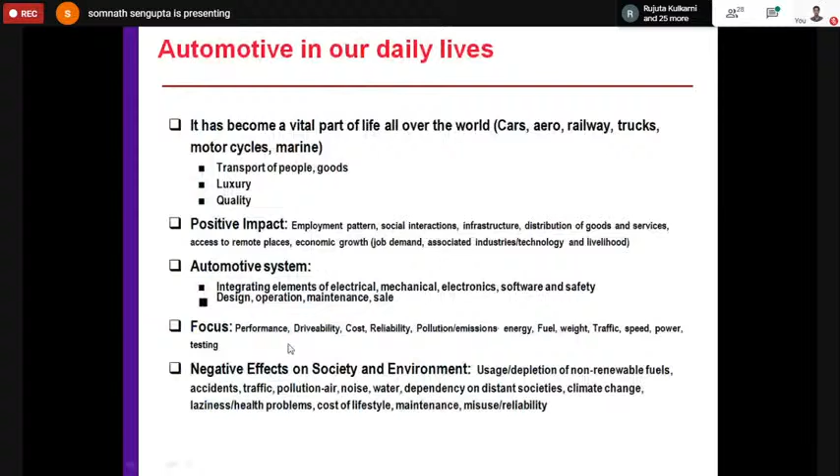So why am I talking about these simulation software? Because they help us make a foundation for developing control strategies, for modeling, and for analyzing the performance, so that we can proceed towards more advanced things: improvement of performance, drivability, cost reductions. We can do all kinds of things, because directly we cannot just go to the vehicle and start tweaking the parameters—that's a very costly affair, and sometimes it's dangerous for testing. But in simulation, before going to the actual hardware, the field, we can always go back to the simulation part.

And then we have DSpace also, which has models for testing, and they also have hardware for hardware-in-loop or simulation testing. Then obviously there's the very friendly MathWorks, which is friendly not just to academics but to industry. They give us a simulation platform, and we can also develop control code, and this supports deployment of code into microcontrollers and microprocessors, so that we can quickly test our control strategies.

Then obviously Bosch gives a lot of electronic control units. We have fuel injectors, actuators, brakes, spark plugs, batteries, etc. So plenty of these companies don't directly manufacture vehicles, but they indirectly support the automotive industries.

Then you have Cummins, which is quite specialized for engines and generators. And Eaton is also there—they're mostly into heavy engineering, so mostly power design, manufacturing, sale of powertrain for heavy vehicles. They mostly deal with controls and transmission.

So these were again the associated industries. It's not just, as I said, the jobs that they generate—it's also about the technologies. Since these industries may not be always expert in all of them, many times they provide subcomponents or subsystems. Using this, you can analyze the overall performance of the system, towards betterment or something.

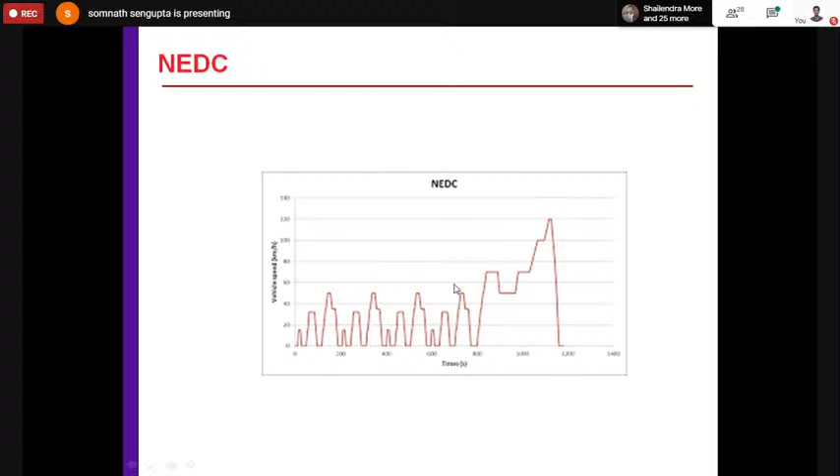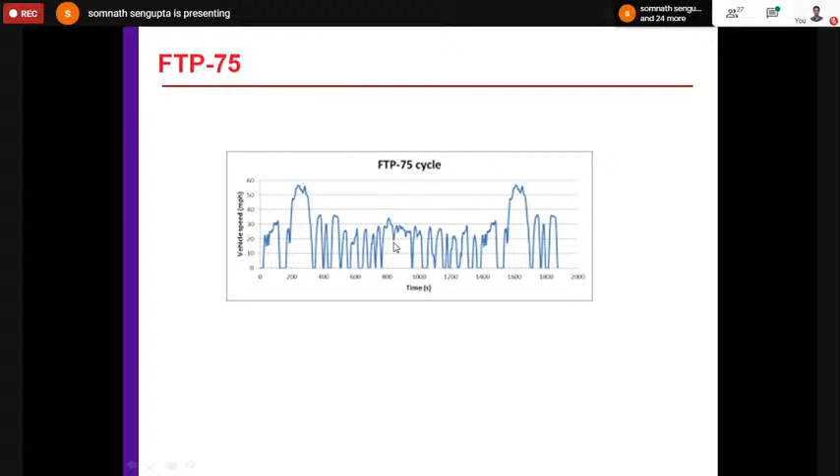As compared to this, then you have the HWFET. Here you have a lot of transients, but here you don't—the speed never goes to zero. That's one key difference. It continuously runs at a higher speed, and the tractive demands are always on the higher side.

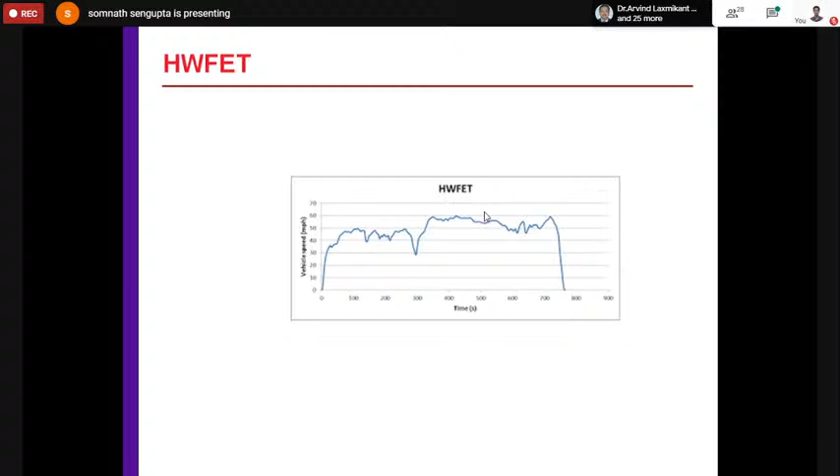Then this is our modified Indian drive cycle. It is developed by ARAI, and mostly they use this for characterizing vehicle performance and for doing all kinds of performance analysis.

So here is the cold start cycle, this is the urban driving cycle, and this is the extra urban driving cycle. This is kind of a modified or mixed Indian drive cycle, capturing the typical behavior in a somewhat simplistic way. You can see the top speed is around 90 kilometers per hour or so, but not for a large portion of the time.

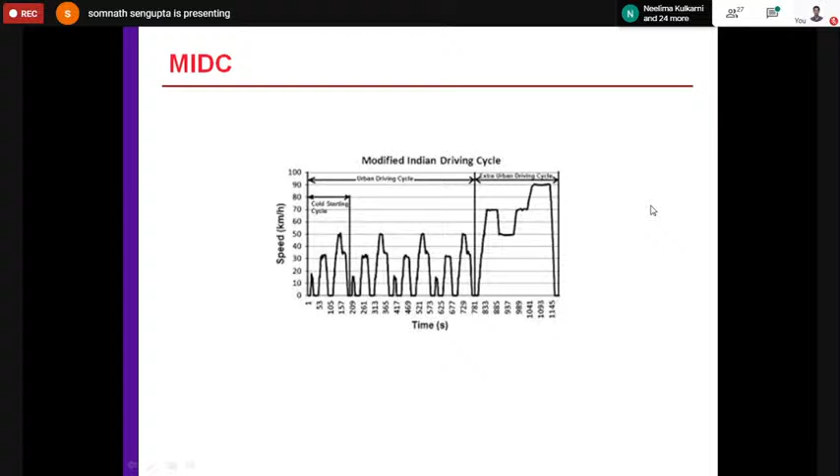Now let us go from the external environment to the internal environment. That's why I'm talking about the powertrain here. So what is this powertrain? It is responsible for transformation of power from the place of propulsion all the way to the wheels.

So then you have this engine, then you have the clutch—this is for a conventional vehicle. Then you have the transmission, then you have the propeller shaft, which moves at a lower speed compared to that, and then you have the differential.

This differential is used not only because it has a single gear, but also for negotiating curves. If the car is taking a left turn, the inner wheel will rotate at a lower speed and the outer wheel will rotate at a higher speed, and the differential allows for that. Typically it's a mechanical arrangement, but nowadays we are also having electronic differentials. I won't explain that in detail here, but it has multiple internal gears.

So ultimately it's always a single fixed gear ratio, but inside there will be some rotational toothed wheels, in which there's something called the spider gears and ring gear, and all these things, and using that they'll be able to negotiate the turn. Then you have the axles, and then it goes to the wheel. The wheel meets the road, where it has to overcome the inertia and the resistive forces. So this is the journey of the power that gets transmitted, and it also experiences the loading effect because of the wheels.

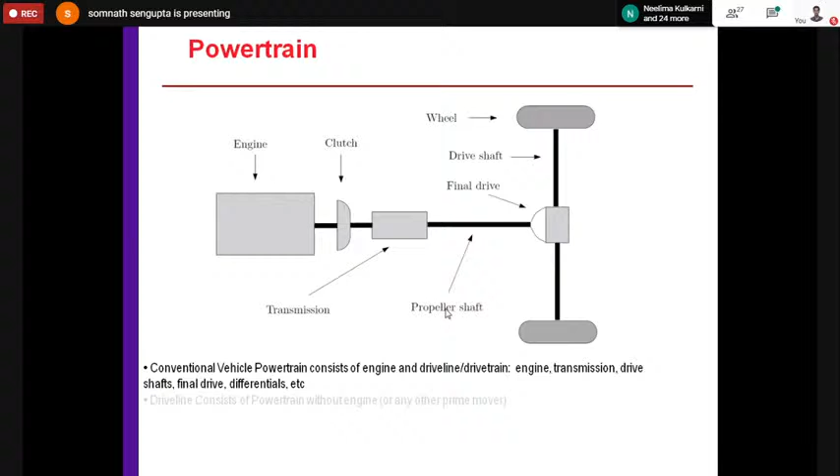I just mentioned that consider powertrain without engine and all. So driveline is all these things without the engine part. Typically it's a mechanical system. For electric vehicles, this clutch may not be there, and then we have the motor there.

Typically we can analyze the second law of motion used to derive the models. The lower gear will result in higher torque transfer and higher torsion. So lower gear, typically in a vehicle, has a higher gear ratio, and that multiplied with the torque generated will be higher. The speed will be lower.

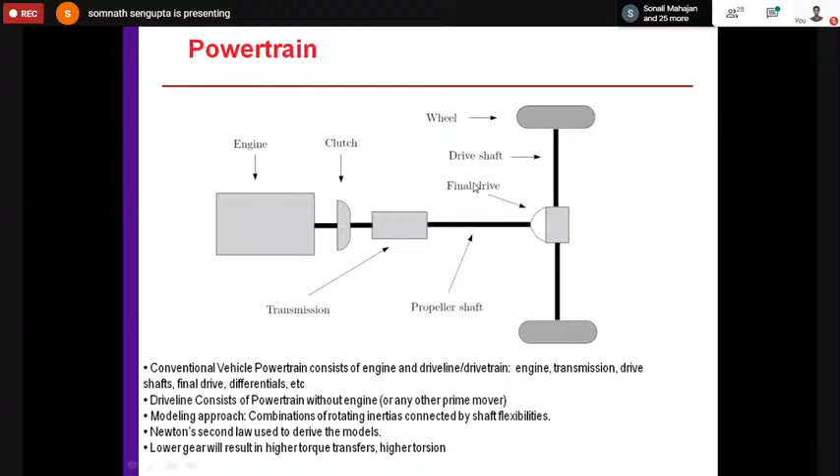Now having this powertrain in mind, HEV is all about changes in the powertrain structure. Nothing external typically changes, apart from maybe the charging thing, but typically an HEV, in very layman language, has a motor and an engine, and then there are different configurations.

One is the series HEV, in which the entire propulsion, the mechanical power, is through the motor. The engine behaves as a generator working on its optimal operating point, and then it charges the battery. From the battery, the motor is always mechanically powering the output, which will power the wheels.

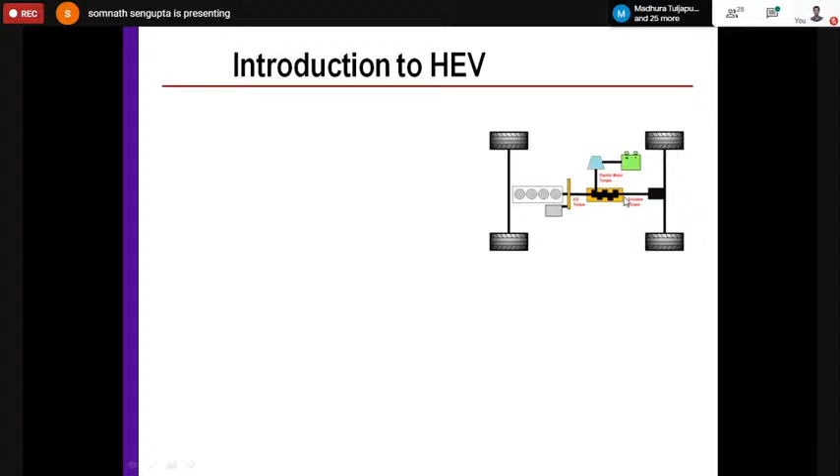But in case of parallel HEV, which is more complex control-wise, both the power produced by the engine and the motor are mechanically coupled. That's why the control strategies are much more complicated as compared to a series HEV.

So this is the need for HEV. One is fuel consumption - why do you have HEV? Because the engine consumes a lot of fuel, so it's good to have a motor which will assist in such a way that some part of it would be taken care of by the electrical energy. Second is the emission legislation.

There's a huge pressure, right - Bharat 4, Bharat 5, Bharat 6. I think we are quickly shifting to Bharat 6 emission norms, in line with the Euro 6 norms as well, but I think there's still some going on. I mean, we have not yet implemented those emissions fully, we don't follow those things strictly. I've seen some very old vehicles with Bharat 2 norms as well.

But we should go there because it affects the emission. They are not so stringent, and because of that there are too much emissions, and because of which you can see bad air quality all around, at least around India. So this is where the electrical source of power helps - you'll be using less of the engine, and then you can emit less emissions because of that.

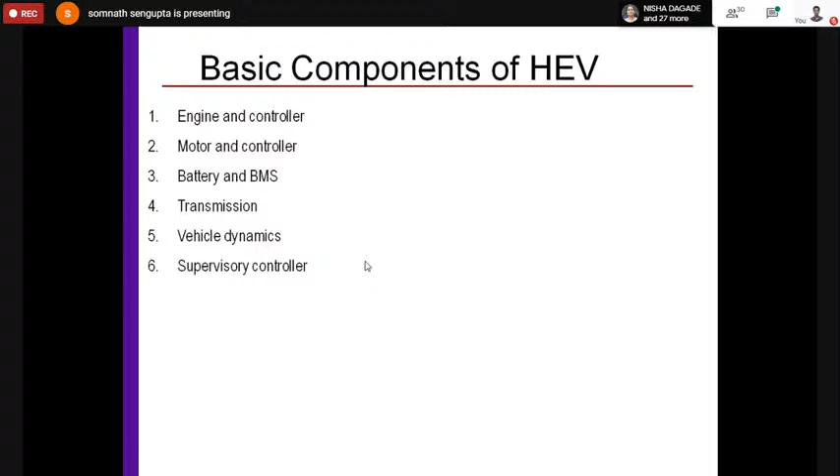So vehicle dynamics per se is not a component, it's a formulation kind of thing, it characterizes the vehicle systems, and it talks about what is the longitudinal motion, what is the lateral motion, how the vehicle behaves. This is very important for analyzing the safety of it, to see whether the vehicle is propelling to the required speed or not. And of course, the supervisory controller, which I've just talked about, it's a hardware board, and it can be mostly separate.

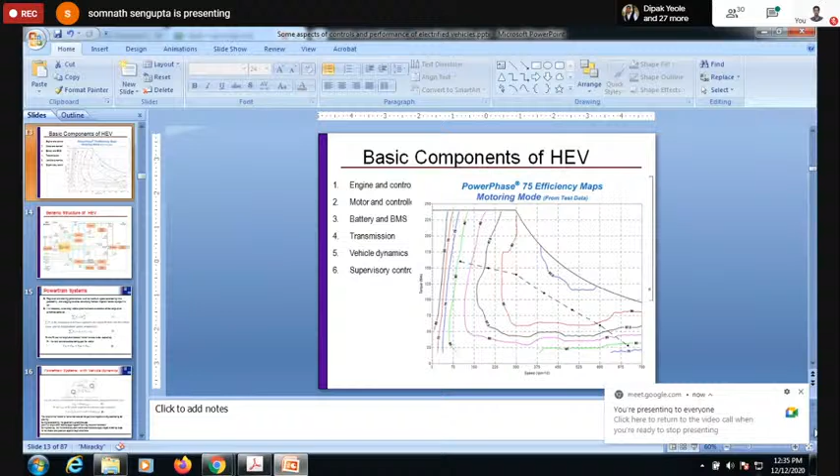Hello. Yeah. Sorry about that again.

So this is the torque speed efficiency curve. These are again important for designing controllers, so that the torque speed of the motor will be at least close to these curves or contours, so that the efficiencies are the highest possible.

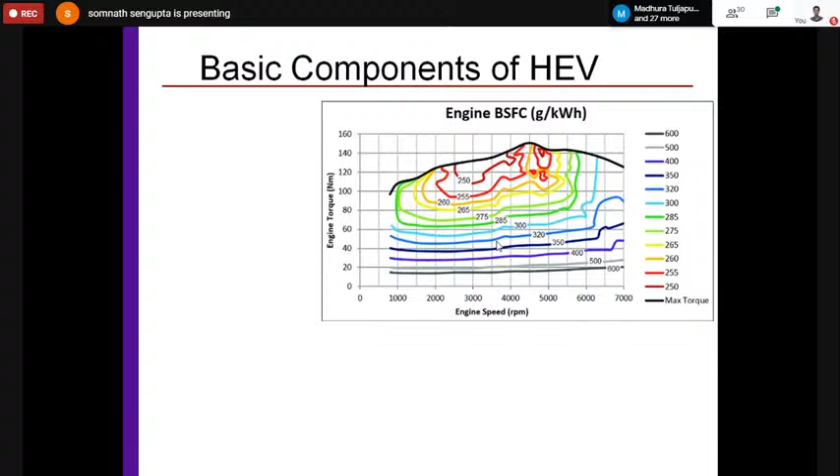Of course it's not always possible, but these are again important for the supervisory controller. It will try to take into consideration these curves, and based on these curves, it will try to do the torque split between them, at what point whether the engine is more efficient or the motor is more efficient, so it will consider all these aspects. It will also consider the fact that the total torque demanded...

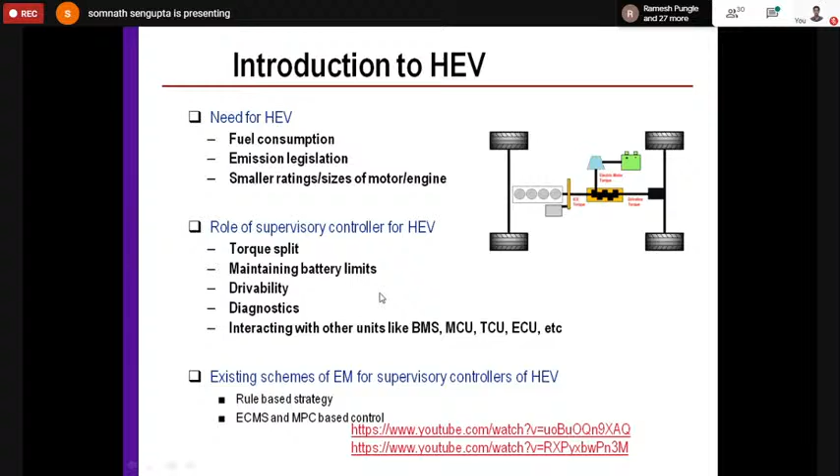Let's say the motor is small, the engine is also small, so it will try to give the right amount of torque command so that the demanded torque is satisfied. It will take care of all these things, but it needs knowledge of these things. That's why it is very important to know these torque speed characteristics, both for the engine as well as the motor. So these curves will act as references so that you will be able to design the proper control strategies.

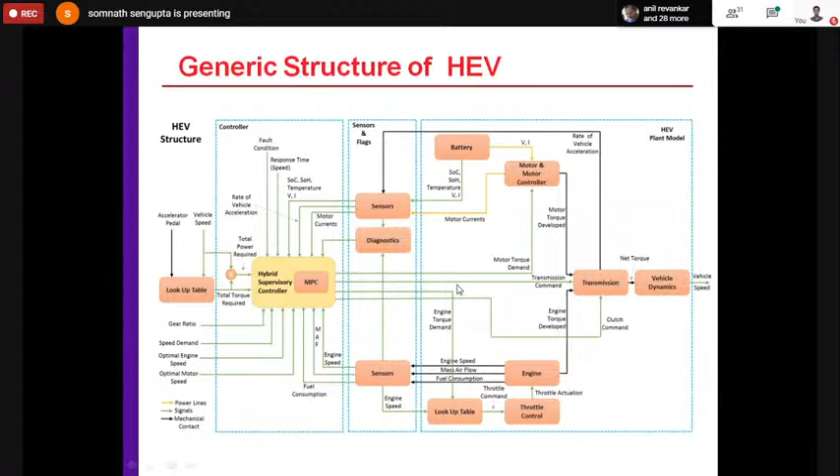So that's why it's very important to understand the forces. As I said, it's not just electrical or mechanical, it's actually both, or rather it's all electronics, electrical, software, everything. We need to understand this so that we'll be able to design electric vehicles, not just the architecture, but also the control strategies.

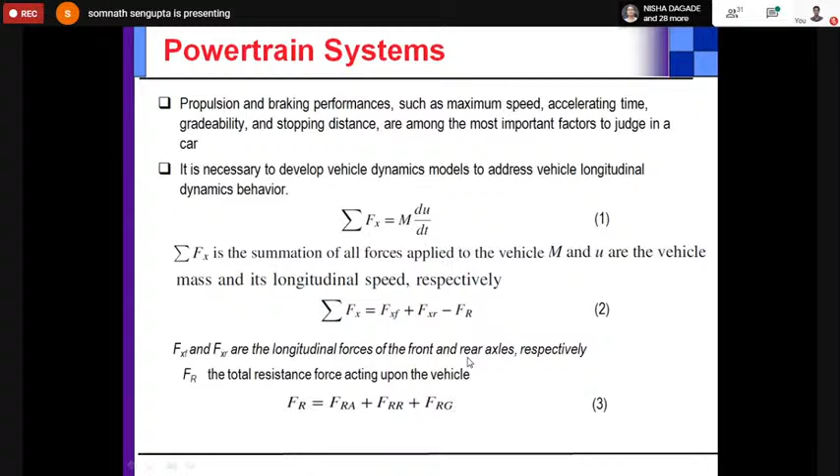This net force is the tractive forces at the wheels, the front and rear wheels, minus the resistive forces. The resistive forces can be due to aero drag, rolling resistance, and the gradient. So it's like a free body diagram of the car, and you can see there are different forces acting on it.

The aero drag is half rho Af CD u squared. Rho is the air density, CD is the coefficient of drag, Af is the frontal area of the vehicle, u is the speed. Then you have mu, the coefficient, and mg is the weight of the vehicle, then mg sine theta. These together form the total resistive force.

During acceleration, the powertrain produces positive longitudinal force by applying positive driving torque to the wheels. During braking, the friction braking system adds another negative braking torque to the wheels, or sometimes if it is regenerative braking, the braking torque comes from the motor to the axles, and then it behaves as a load for the axle. So two directions of braking torque come: one is the mechanical friction braking torque, the other is the regenerative braking torque, both applied to the wheels and producing negative longitudinal force.

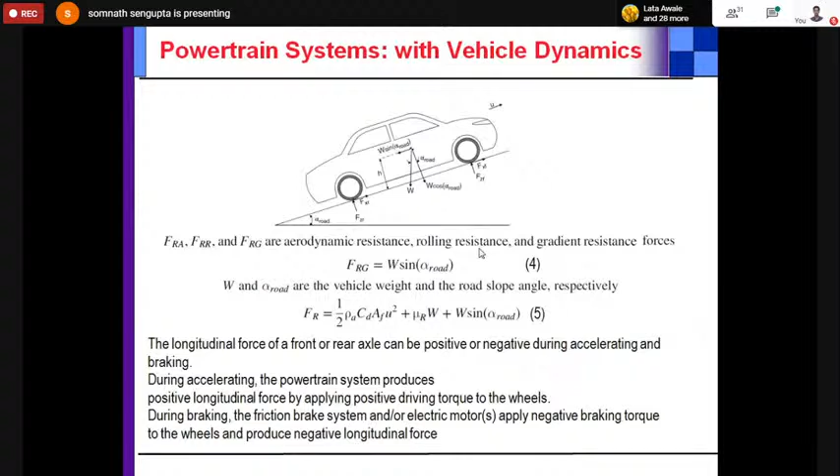Now based on the torque, we have to talk about the torque split. Let's say I told you that 100 Newton meter of torque is required. Now how to decide, whether to use 50-50, 40-60, 60-40, or 30-70 split? For that we need to analyze each of the curves.

So let's say for the engine curve, we'll typically be using the motor at lower torques, and from lower speed to higher speeds, but then you can also have a power assist on very high torque and high speed parts. So you can have both engine and motor for that, and typically in this region you can have engines also.

So these are again like an if-then-else situation, which can be easily captured in flow charts. Using flow charts you can implement this if-then-else logic.

If there is sufficient charge, and the torque that the motor can deliver is... by the way, I think I forgot to tell you that just like engine maximum torque, we have the maximum torque envelope of the motor also. At different speeds this is the maximum torque, and this is the base speed after which it goes into constant power mode, meaning with increasing speed the torque reduces.

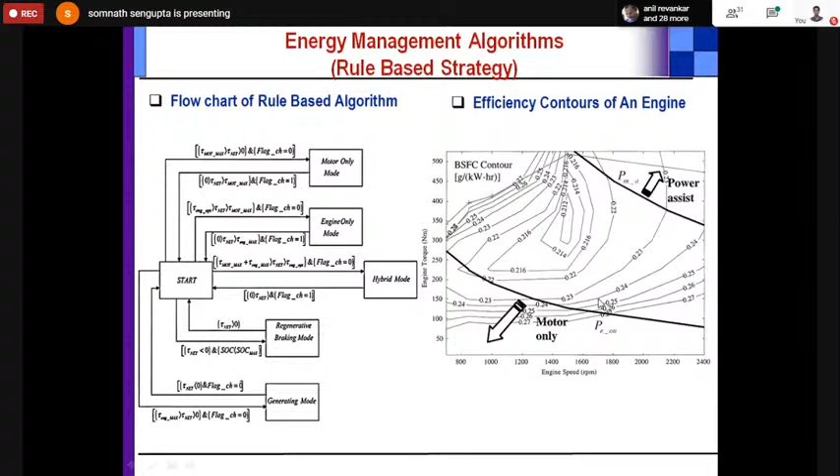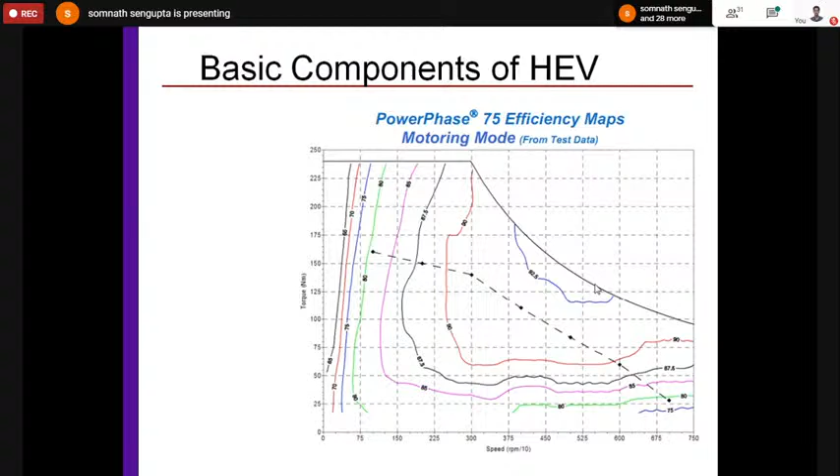What am I trying to say here? These drive cycles, which I've talked about, actually correspond to different torque speed points. So if we try to generate drive cycles which correspond to better torque speed points, we can have better efficiencies. If the torque speed points adhere to curves having higher efficiency, then overall efficiency will increase. That is what the paper was all about. It's not a very complicated paper, but we got some good results, so I wanted to share this.

So I'll be just talking about these things. Now I'll be shifting gears, because I will now only be talking about electric vehicles.

KPIT has a bus called Revolo, and they had given that bus for testing. We verified our simulation results with the practical results.

So electric vehicles are first of all criticized for their limited range compared to conventional fuel-driven vehicles, because there is always range anxiety. The problem here is that research work is always about solving some problem, and the problem we're trying to solve is how to improve the range. By improving the efficiency, so that we can save more energy and go further for the same charging.

But the driving pattern also influences the energy consumed in electric vehicles over a path. That's because if I do a lot of acceleration, the torque-speed points will be different; if I do less acceleration, again less torque. All different situations come into picture. So the way I am driving has a huge impact.

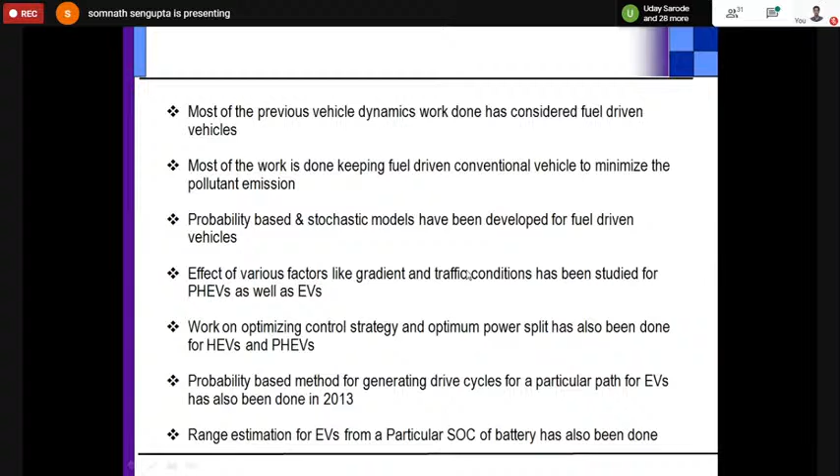Now let us look at it closely. Let's go back to the beginning. Ah, sorry, somebody is calling me.

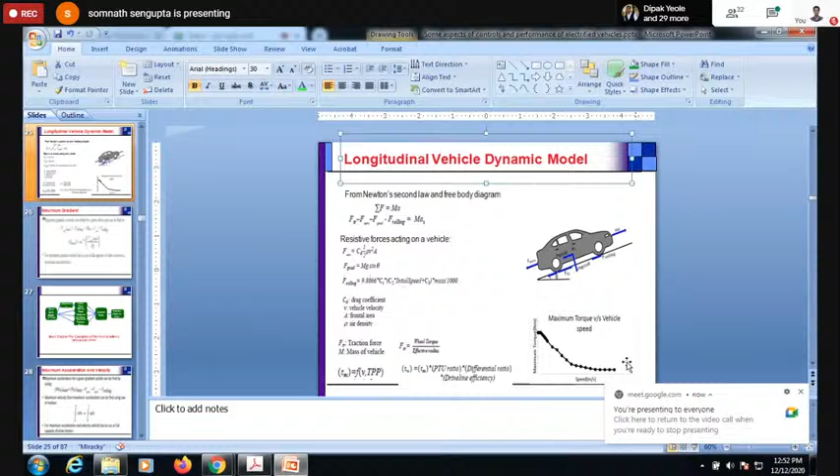Yeah, sorry about that. Am I audible? Yeah. Let us look at it.

We did this for an electric bus, and tried to analyze the different forces acting on it - the rolling resistance force, the gradient force, the aero drag, and the net force, which is mass into acceleration. These are the expressions for the rolling resistance force, the gradient force, and the aero drag force.

These drag coefficients were given to us by the company's R&D people, and we used these coefficients along with the characteristics of the motor.

If you see, the motor had a speed-torque characteristic and a maximum torque envelope. We cannot exactly give the motor's characteristics, so this is just a representation of the torque-speed character, showing the maximum torque available at different speeds. You can see that at higher speed we cannot deliver more torque. We have to consider this before talking about drive cycles. This is not about efficiency, it's about the maximum torque the motor can deliver at different speeds.

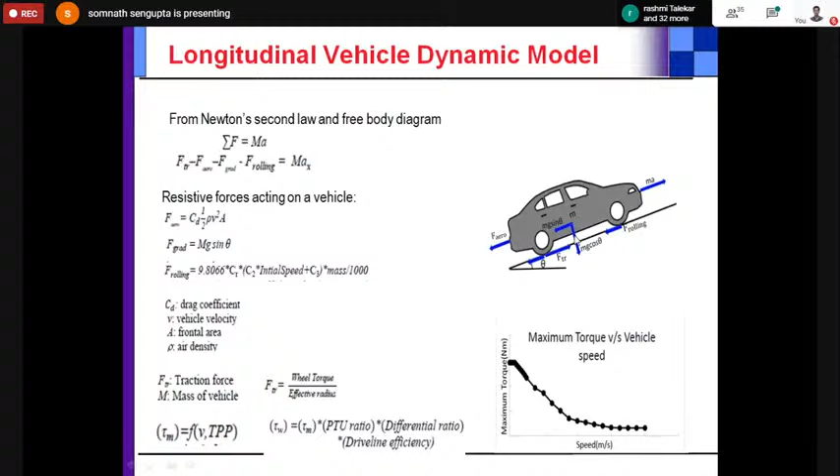This is again for a given drive cycle, given speed, so we can get that result, with the vehicle running at full capacity. For maximum gradient, this is for TR max—considering the motor is giving maximum torque, which results in maximum tractive force, and based on that, we find the maximum gradient we can get.

So how can we get it? Through these drive cycles, we can characterize the drive cycle—what acceleration we can have. We can see the speed at each point in time, T1, T2, T3, and from that find the acceleration rate, which is the rate of change of speed. Using this acceleration, I-alpha, rolling force, aero drag, and other factors, we can calculate things. I-alpha is roughly proportional to the mass of the vehicle, but it's a bit more complex than that.

I think somebody is sending something. Is there any? Okay, fine.

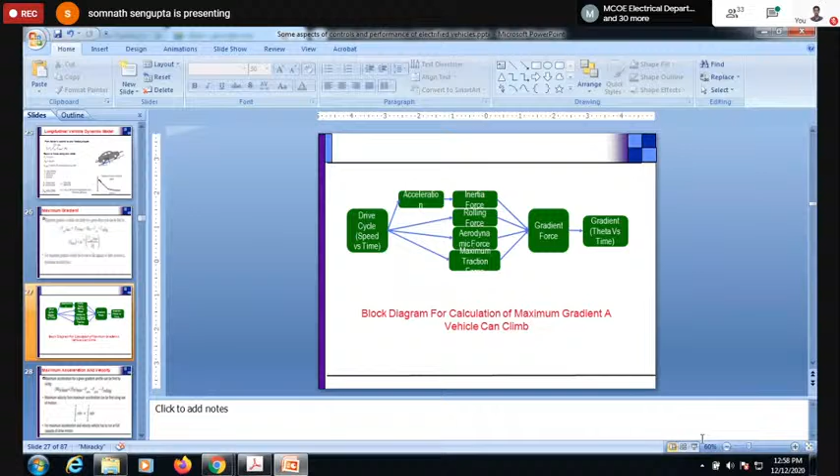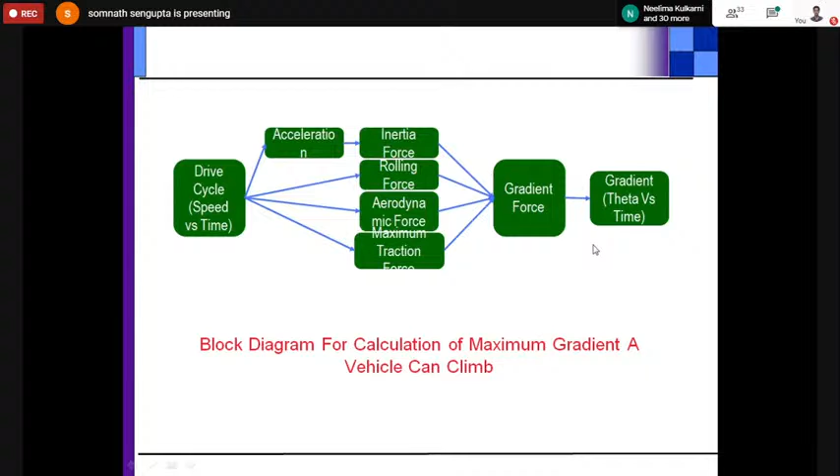Okay, so based on all these considerations, we can also talk about the gradient force. Using that, this is the representation, and we can find out the gradient theta versus time. At each point, given the speed, this is the instantaneous speed we are extracting from the drive cycle, and corresponding to each of the speeds, what is the maximum gradient that the vehicle can negotiate? We can do these things thanks to the expressions.

This is coming to the maximum acceleration that it can have for a given gradient profile. We cannot have two variables for a single equation, so we're keeping one, assuming that something is known. So what should be the other value? For a given gradient profile, let's say we know that the vehicle is moving up a gradient, and we know what the gradient is. Then, for a given maximum possible tractive force, because of the maximum torque that can be delivered by the motor, what is the maximum acceleration we can achieve?

Why are we doing this? Again, we try to find out the maximum acceleration so that we don't exceed the given acceleration. Using this very simple relation: v dv by dt and ds by dt. It's simple mathematical jugglery. Speed is equal to ds by dt, where s is the distance, and acceleration is equal to dv by dt.

So that means from 0 to this speed, and from 0 to s, this is the distance. So when it is going from 0 to v speed, the distance traversed is from 0 to s distance. What is that? What is the maximum velocity from maximum acceleration? Using the maximum acceleration, we can apply the law of motion. So how can we do this actually?

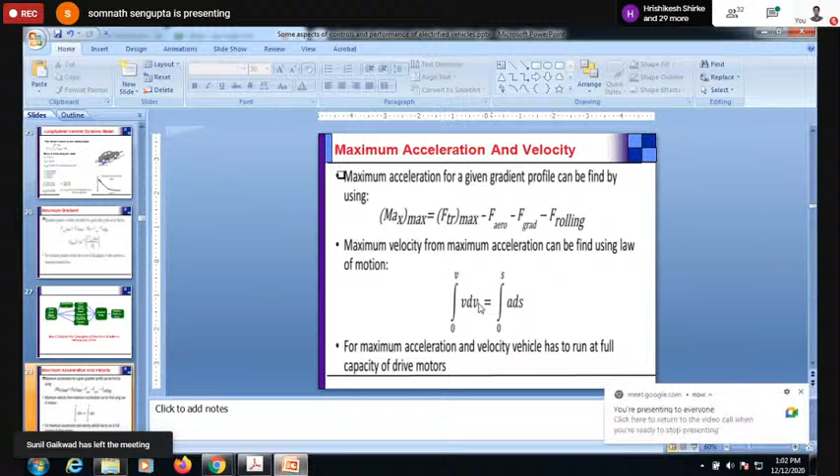Yeah, sorry, once again. Yeah.

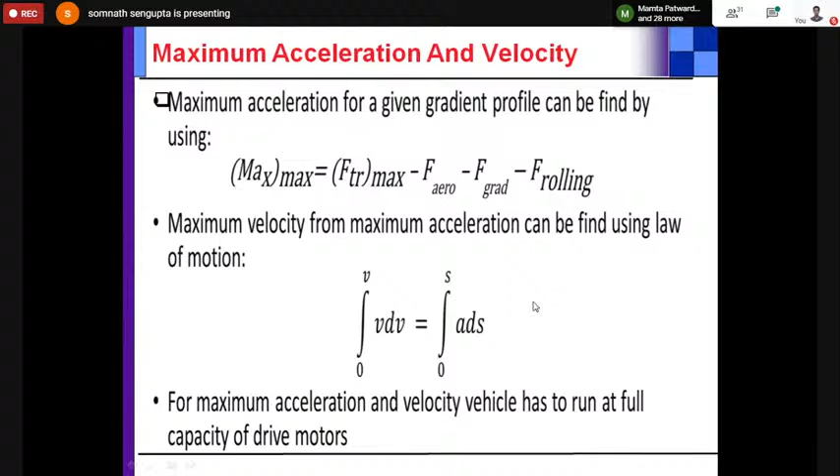This will actually help us in shaping the profile, which is not directly mentioned, but there is an algorithm we have developed. Using this concept, we generated the driving cycles that are best possible, which will go through the best optimal efficiency points for that.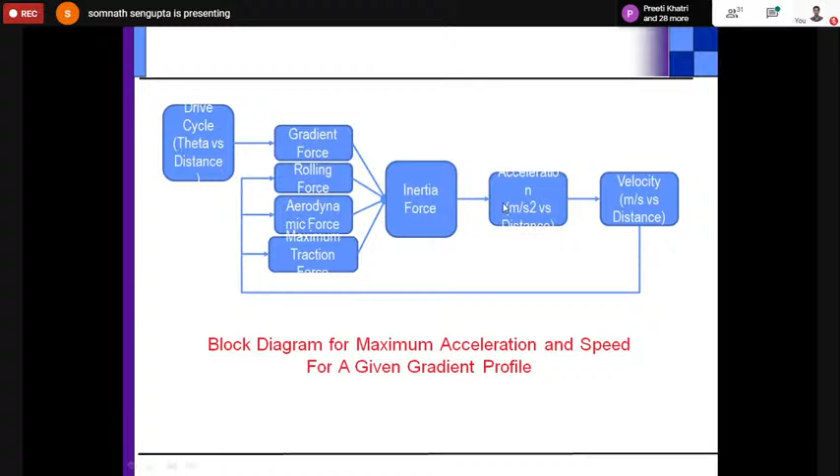Now, similar to the gradient part, we could find out the acceleration part also -- what is the maximum acceleration given a gradient force. Once we know the gradient, we can find out the maximum acceleration that is possible. This will govern each point since we will be generating these drive cycles. I'll just do some forward referencing here.

We'll be generating these drive cycles here -- this kind of drive cycles. These drive cycles will be generated, but we know the maximum acceleration we can have, so this governs the maximum limit on the acceleration. This tells us that at this gradient, what is the acceleration, and similarly, what is the maximum gradient we can have. So all these situations will be helpful in that, and we develop these algorithms.

I think in the interest of time, we have to just talk very briefly about this. Based on that, we keep on generating these torques, and we keep on generating these speed points.

How do we do it? We do back calculation from a given torque. So let's say that some torque is required - this is the T min, and there will be some ratio fraction of the maximum torque.

From there, we are trying to find out what is the acceleration needed to satisfy this torque. But in order to have that acceleration, is it exceeding the maximum acceleration we just computed? Then for that acceleration, we'll also talk about the jerk, because jerk is the rate of change of acceleration. From that, we'll find the speed.

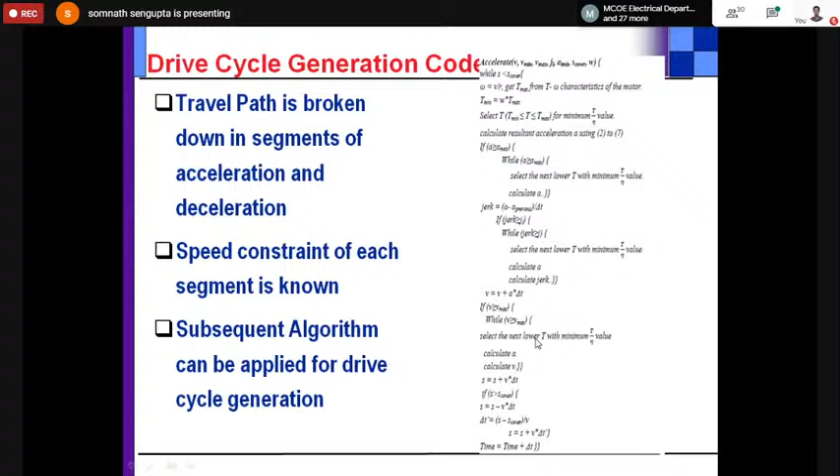Then from the speed, we'll find out the distance it will be traversing. So this is an algorithm which we developed, and from this we generated the drive cycle. This drive cycle automatically keeps on generating, and it will actually behave as a reference for a driver. I'll share the slides also - this is a set of points in which you can keep generating that.

And of course, we can always say things like torque divided by efficiency, because the torque gets affected as it traverses from the motor all the way to the wheels. Similarly for deceleration, but it happens in the opposite direction - just like torque divided by efficiency, here you have torque multiplied by efficiency.

So the torque traverses - this is the mechanical torque, and then it gets multiplied. The mechanical torque at the wheels gets converted from torque to speed, mechanical torque speed, then converted all the way to the battery. So the mechanical power, in case of regeneration, gets converted to electrical power.

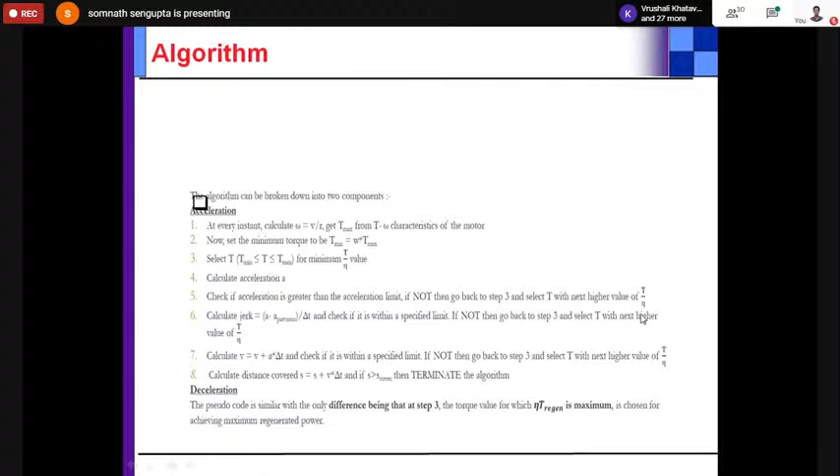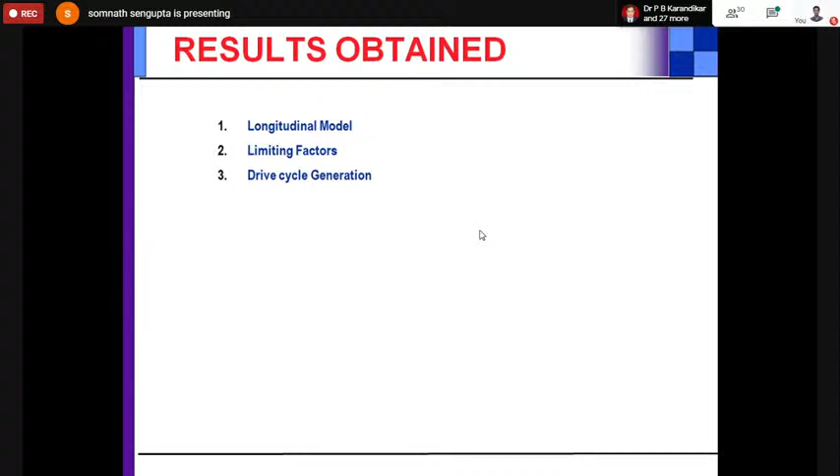Now, using these algorithms, we could generate plenty of results. But before that, we were actually using an actual electric bus, and because of that, we had to ensure that whatever model we're trying to build, which mimics the actual vehicle, matches as closely as possible. Then only we'll be confident in saying that whatever model we developed is mimicking the actual real system.

So that's why we use these parameters - these are real parameters from an actual vehicle: motors, frontal area, differential ratio, tire radius, drag coefficient. All these things were actually given to us by looking at the vehicle. And then we used the same motor - you can see the motor rating, everything. We used the same equations, and surprisingly, it matched very, very well.

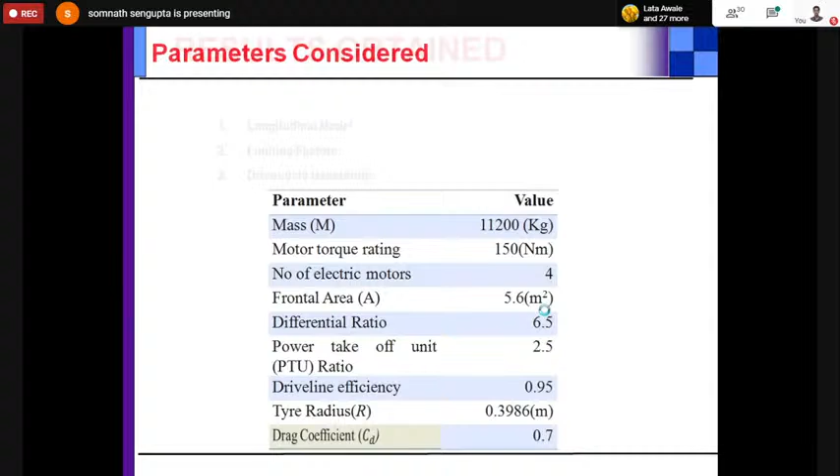So one is the real electric vehicle data which we gathered, and the other was the model data. You can see that both are matching - more than 95%. Because it is short, there are some discrepancies here, but the entire trend is matching. So what we did was use the same equations and same parameters, and using this model, we were able to match this.

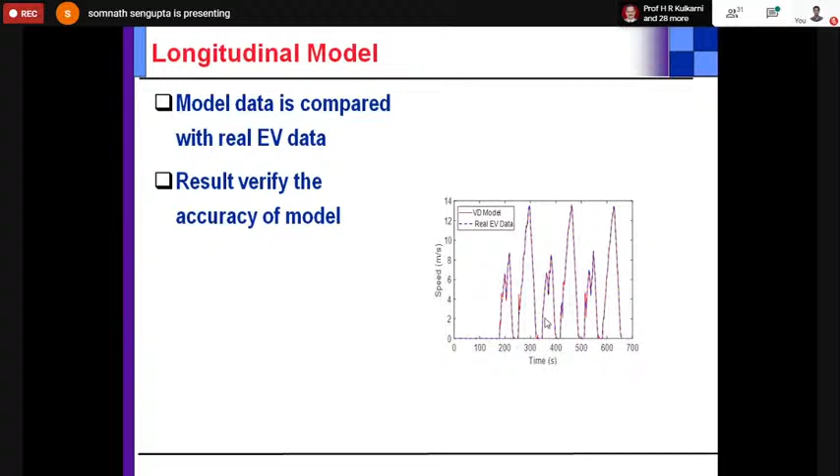So they verified the accuracy of the model. Once we verified the accuracy, we had the confidence that since it is behaving like the vehicle, we could do all kinds of operations on it - we used it just like the vehicle.

So we used it in different drive cycles - one was the Mumbai drive cycle, the other was the Delhi drive cycle. This was the velocity profile for the Mumbai and Delhi drive cycle respectively, and these were the different gradients - this is the gradient that can be possible, even this negative gradient.

In order to sustain this kind of motion, you can see that the gradient cannot possibly be positive - it has to be negative. Even zero is not sufficient.

That means at very high speeds, the tractive torque of the motor is not sufficient to sustain this speed. So what do we need to do? We need to have a negative gradient also in this space, so that the extra traction will be provided by the negative gradient force.

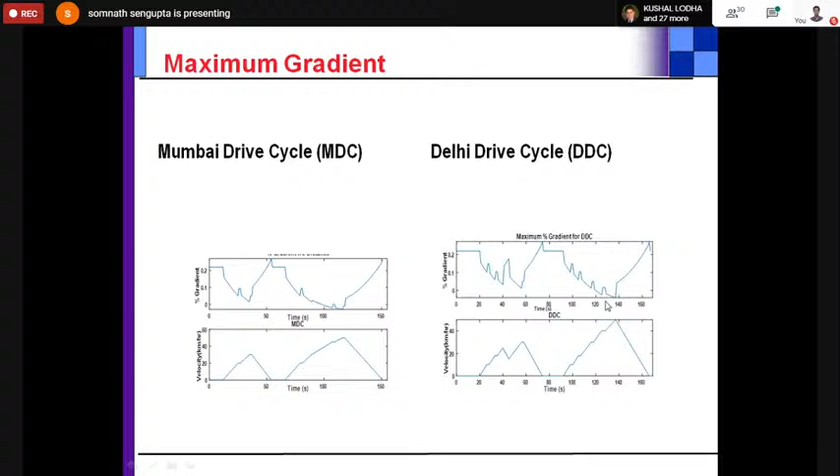Similar to the Delhi drive cycle also - you can see that the bus is not very sufficient for a Delhi drive cycle, even though this is quite high, but then we need some kind of negative slope so that it will give some extra traction force. This is what we analyzed.

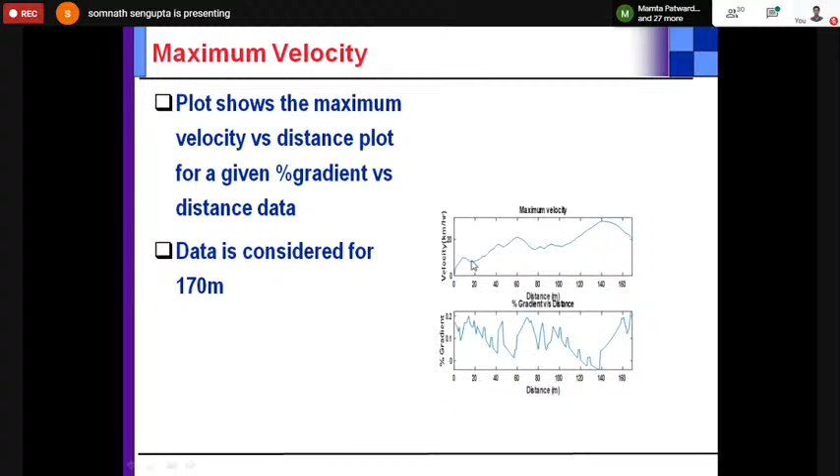So now this is the maximum velocity. Similarly, we could also get it at each of the points. So for a given gradient, what is the maximum gradient velocity that you can achieve? We could compute all these things.

Now, drive cycle generation data. Using all this analysis, we could generate the data. So what is the data we generated? We just generated the speed versus time profile, which was nothing but a set of accelerations and decelerations. We iteratively did that using these algorithms, considering the upper and lower speed limits, and generated these drive cycles. There are different types of drive cycles: smooth drive cycles and mini drive cycles, which are more efficient.

This was the weighting factor. We had used some weightage factors to talk about what is the ratio of maximum torque that we are using. So when it's one, we are using maximum torque. But with different weighting factors, with zero weighting factor, the time taken was quite large, with less torque, very less torque, but the net energy consumption was quite low. In the high torque case, when the weightage factor was high, the net energy consumed was quite high. So it's somewhat inversely proportional.

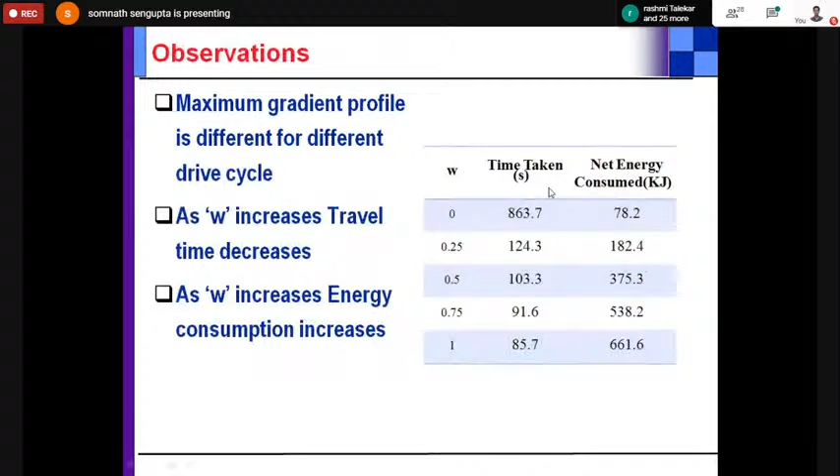It's not the same drive cycle, but it is the same distance. The distance is the same, but the integration of the area is nothing but the distance, and that is the same. The area under the curve, the integration of the speed profile, is the same. So we can choose all these things.

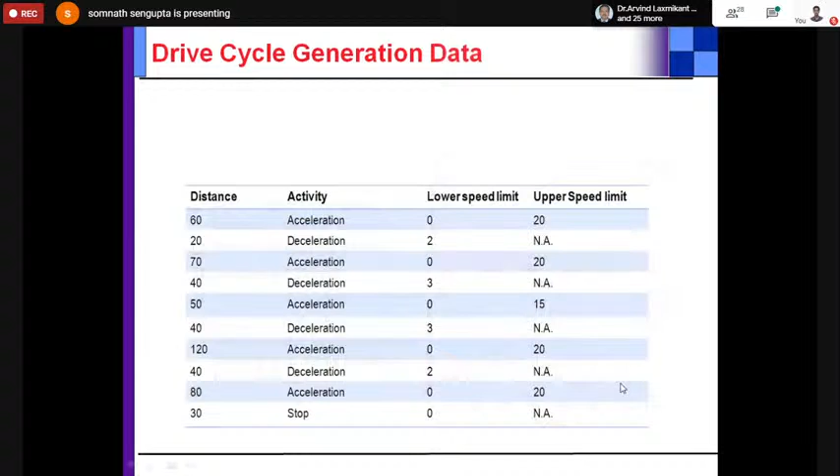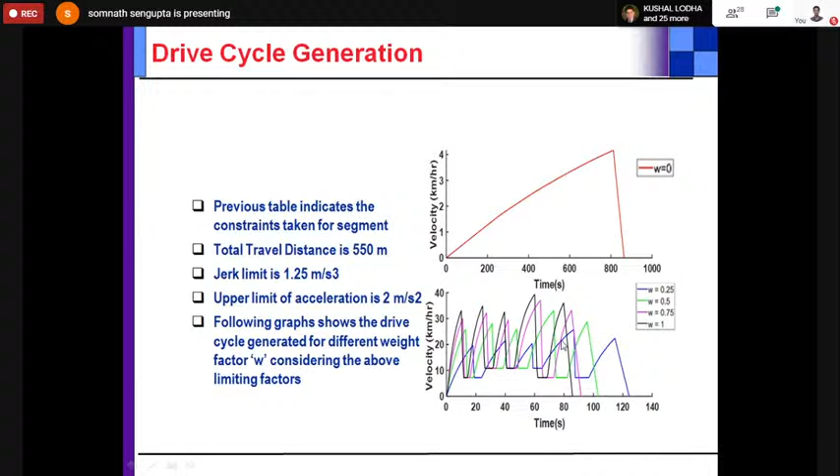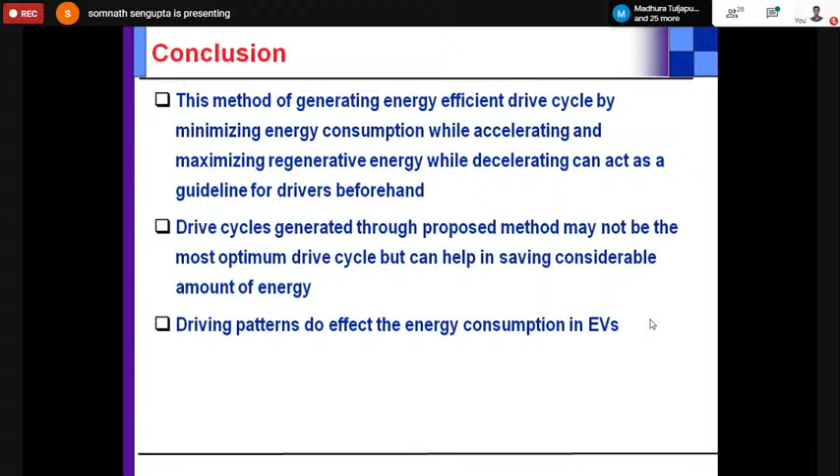So this option is given to the driver: if W is equal to 0, then you can have the best possible energy consumption. But if W is on the higher side, the energy consumption will be high, but the time taken will be quite low. So the final point is that driving patterns do affect energy consumption, which is a known fact, and we generated some drive cycles which will help us in doing this.

Now coming to the second case study, I think I'll be able to cover two case studies today. This is again related to electric vehicles, but it's a very interesting topic: the predictive supervisory controller for an HEV operating in a zero emission zone.

In different parts of Europe, like the UK, I saw there are places called low emission zones. This is coming up in India also, where certain places don't want emissions because of safety concerns, maybe hospitals or child care. So what do you do then? Suppose you have an HEV operating and it enters that physical zone. This was a conference paper we worked on with Tata Motors, and we developed the strategy and presented it at the ITEC conference in Detroit, Michigan. They found it quite interesting.

So what are we trying to solve? We're trying to make a strategy so that the HEV will save enough energy so that the moment it goes to the zero emission zone, it can afford to become an electric vehicle.

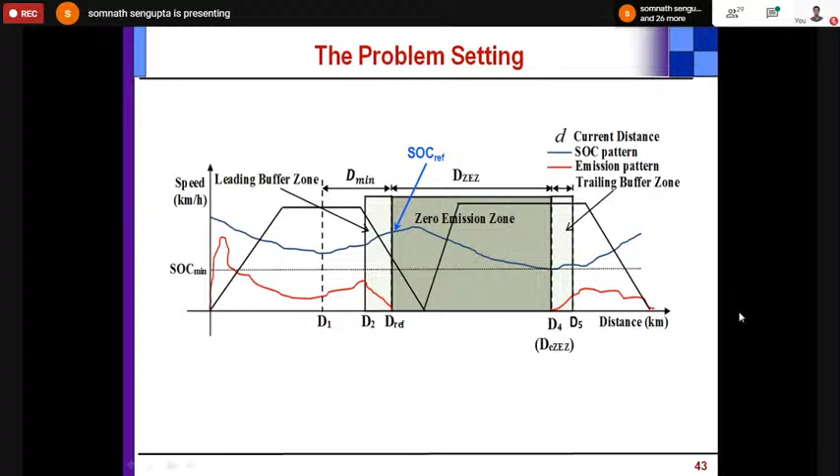The buffer region helped us to taper it off, and similarly taper it on, so that once the zero emission zone is going far and far, it can again go back to higher emissions and start polluting again, happily, without anybody disturbing. But this is what we designed.

So now let us talk about this P2 HEV architecture that we considered. As I told you, HEVs have different architectures—series, parallel, and I think I forgot to mention combined series-parallel architecture is also there. But here we are considering only the parallel architecture, and in parallel there are different configurations. So we use the P2 HEV architecture.

So this is the P2 HEV architecture, and here there is an axle. The engine torque and motor torque are coaxial, delivering torque in a coaxial manner. This is the clutch, this is the gearbox, this is the differential, and this is the axle.

These are the parameters that we used. Each cell voltage is 1.2, vehicle mass is 1000 kilograms, and so on.

So basically what is happening is the motor and engine torque both contribute to the demanded torque at the wheels. There is another clutch here that hasn't been mentioned yet, so we can have different kinds of configurations.

We can have the motor turned off and only the engine running, or the engine turned off and then the motor. So there is a clutch there because we cannot suddenly turn off the engine.

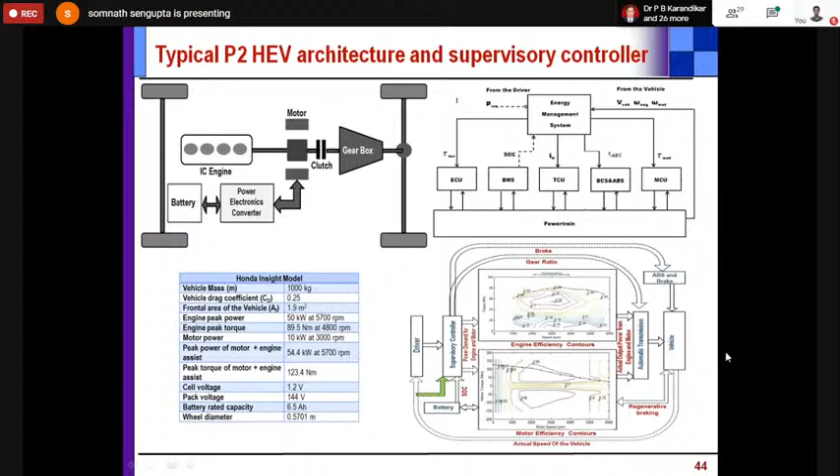And then it will be checking other things like the battery SOC, and other things. So this is in short what I have talked about, the ECU's engine control unit, transmission control unit, the powertrain. They interact with the powertrain components. And this is the CAN bus structure.

There is something called the controller area network. Typically vehicles have this CAN structure, interacting with different controllers. The controllers connect through these buses. They have typically these CAN signals with high-low things, and they have the frame format through which they transfer messages.

Why is this crucial? Because you have plenty of sensors, let's say hundreds of sensors, and the sensors carry information. Let's say the transmission control unit requires the speed, but the motor control unit also needs the speed, and the engine also needs to know the speed. So you cannot have separate sensors for each one.

Or rather, the same sensor, if you connect it to all of these things, there will be plenty of problematic things, because there will be too many wires jumbled up. So that is why we have these CAN buses, so they communicate from one controller to the other.

Let's say the transmission control unit was connected to some speed sensors. The speed information through this CAN bus will travel to all the other control units connected in the same bus system with the transmission control unit. Then you have the BMS also, so this is this communication. CAN is again a controller and has a communication protocol also, so through some frame format, they'll be communicated.

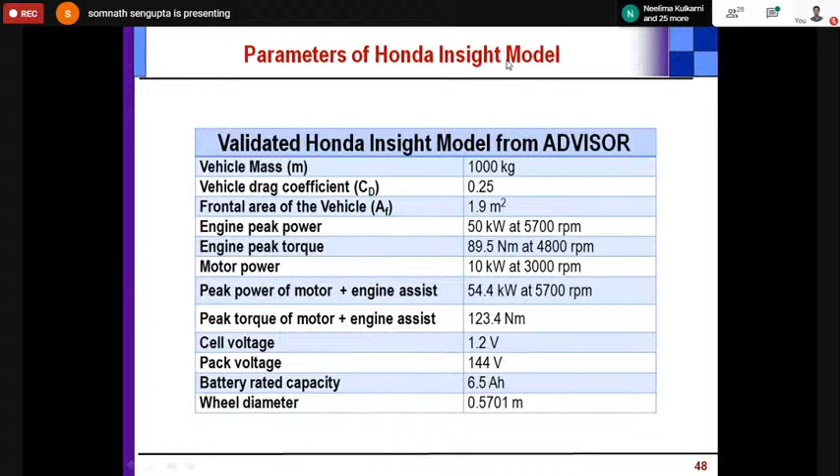Parameters of Honda Insight model. Okay, so this is the model that we used, having motor and engine, and then we use this strategy.

This was the engine consumption minimization strategy, or rather equivalent consumption minimization strategy. This will make a cost function, so that we try to minimize that cost function. In order to minimize it, what should be the value of motor torque and engine torque so that this cost function is minimized?

So this is what this algorithm is all about. It's a simple algorithm. If you remember we had this challenge of determining what should be the torque split. Let's say the total torque at the wheels is 100 Newton meter. How much should be coming from motor? How much should be coming from engine? What should be the torque split between them? This cost function will actually help us determine that.

And this was some weighting factor, the equivalence factor it is called. So let us now dive a little bit into this equation. This is the equivalent fuel consumption, or energy consumption, that we are talking about.

This is the mass of battery, or rather the instantaneous power that will be consumed from the battery. What is this battery power? Tm into omega m is the output mechanical power of the motor. If you divide by the efficiency of the motor, you'll get the input electrical power. What is efficiency? Efficiency of the motor is nothing but output mechanical power divided by input electrical power. So if you divide by efficiency, we'll get the input electrical power.

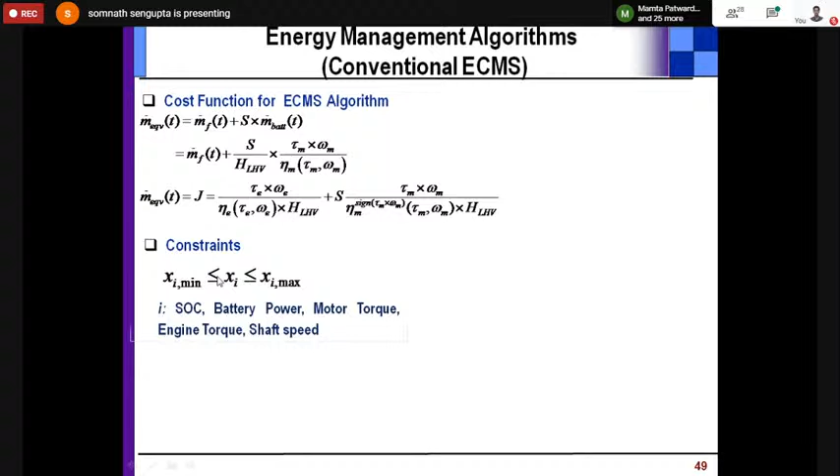And then these are the constraints that we have to see—we'll optimize this, but we have to ensure the battery SOC should not go below the minimum SOC, and similarly the battery SOC cannot go above the maximum. Typically, the battery SOC limits are 0.8, 0.2, and 0.3.

Hello. Hello. Yeah. Hello. Are you trying to say something? Hello.

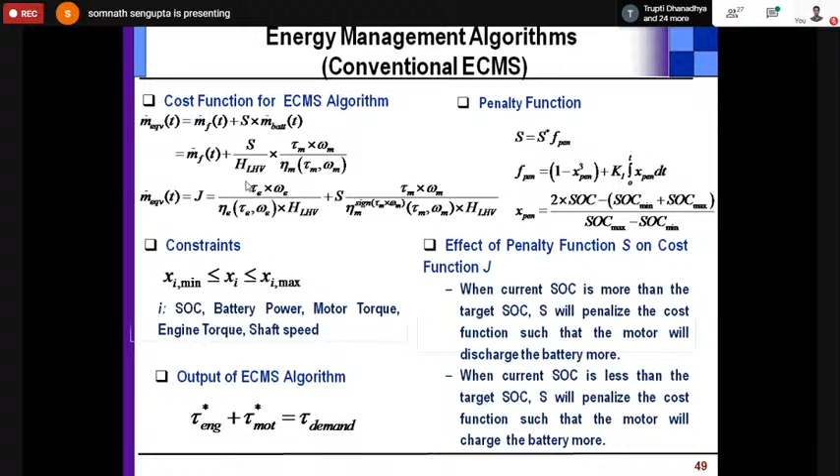So this is the way in which the torque split will be developed. The engine torque, the motor torque will be developed. Okay, this is what I have already talked about. So this is what we'll be doing.

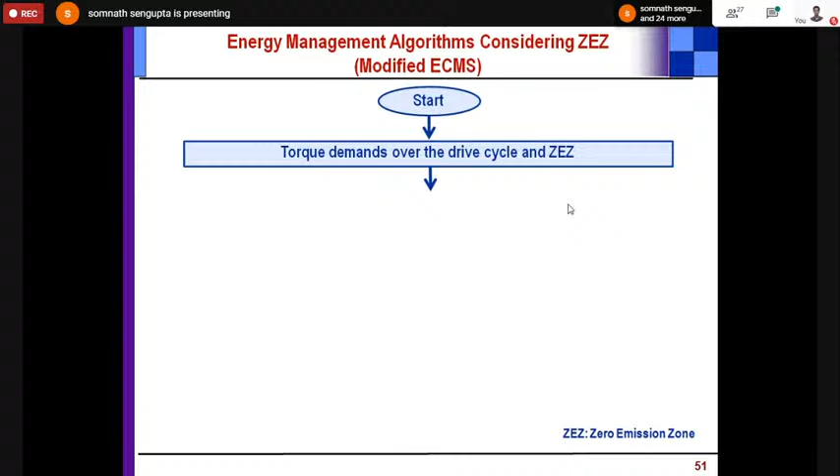So this was the algorithm which we did. We torque demanded over the drive cycle. From each of the drive cycle, we computed. We know that based on the speed, the gradient, and everything, we'll be able to find out the torque demand. And from the torque demand, we calculated what should be the SOC in order to deliver that much torque.

And then calculation of the Dmin. What is the Dmin? What is the minimum distance from which we'll start being very cautious? So this is the calculation of Dmin.

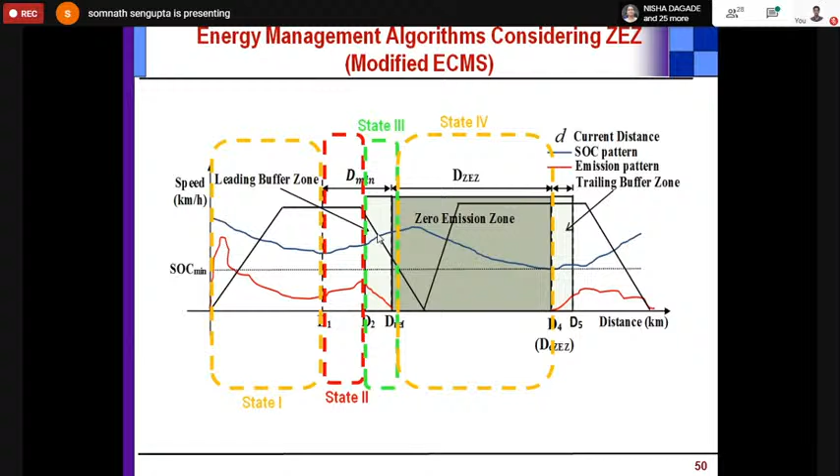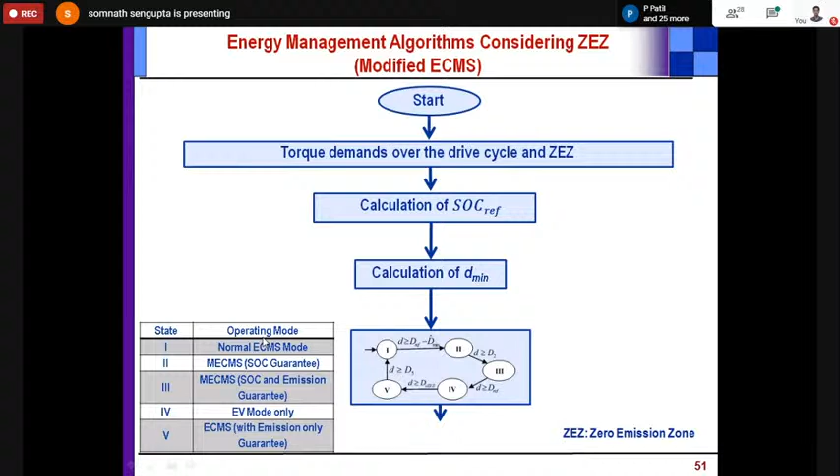Then after calculating, a lot of our work is done. So we know that from the Dmin distance, we will start using the supervisory controller in a more specialized way, so that we'll start saving more SOC to sustain us in the zero emission zone. And then if we went through all these zones using different modes, we changed the optimization formulation, and then we could achieve this.

In the interest of time, it will take plenty of time to explain, so I'll just cut it short and talk in an overview. You can refer to the paper for more details.

So from the zero emission zone, we found out what is the force at each instance that is required to drive the vehicle. And from that, we found out the torque that is required. How did we find out the zero emission zone force? We use m(dv/dt) plus aero drag plus rolling resistance plus gradient. We assumed the gradient was zero.

And we could find out the motor power that is required. So from torque, at that speed, we could find out the speed, and from there what is the power that is required at each instance. From the power, we could find out what is the energy consumption throughout this distance by integrating throughout this region.

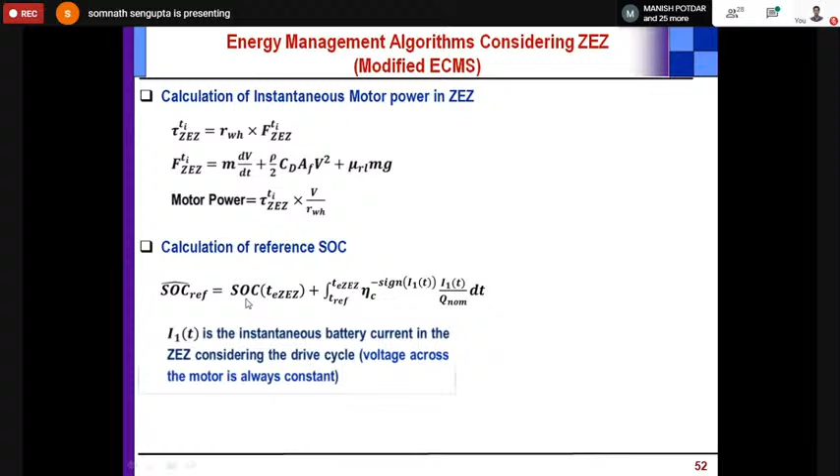And then the moment we saw the energy loss, from that we could compute back the SOC reference. So this SOC reference is coming from the current, and this current will influence the SOC, but before that, the current is actually proportional to the power. So from the power we could find out the current, and from the current we could keep on understanding what should be the SOC reference. So there is a lot of back calculation here.

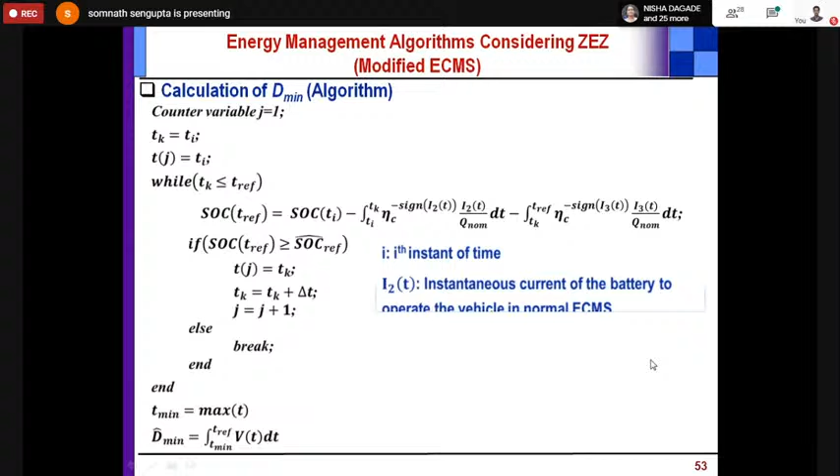Using this back calculation, we developed this algorithm, a different kind of algorithm, considering regeneration and motoring regions, everything we considered, and we could come up with the dmin, the minimum distance from which you will start becoming cautious and execute our special supervisory controller. So this was our supervisory controller.

So this was the same cost function that we used to optimize, but we used it for different regions. These are nothing but region 1, region 2, region 3 and so on. We use different factors here, which changed the formulation, and using that, the aggressiveness of the supervisory controller was changed. So these are the different formulations which have helped us to achieve the result that we'll be seeing now.

One hard constraint, or equality constraint, is that the net torque should always be equal to the engine torque plus the motor torque. Both of them should be at the optimal point, such that the losses will be minimum. So this was the equality constraint.

Now, using this formulation, I'll just talk - I think the time is okay. So, in the zero emission zone, with NEDC drive cycle, using normal ECMS strategy.

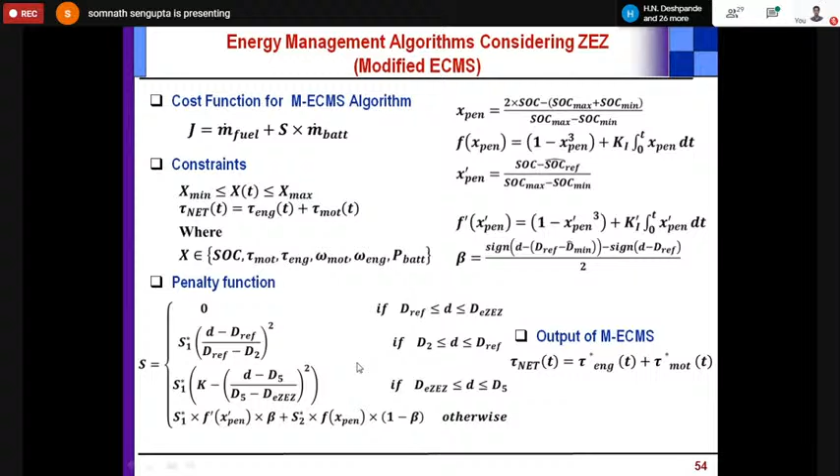As I said, there is already an existing equivalent consumption minimization strategy, and using that we said let's see what the performance is here. So we did not use our specialized modified ECMS strategy - we just used the plain ECMS strategy and see what the result was here.

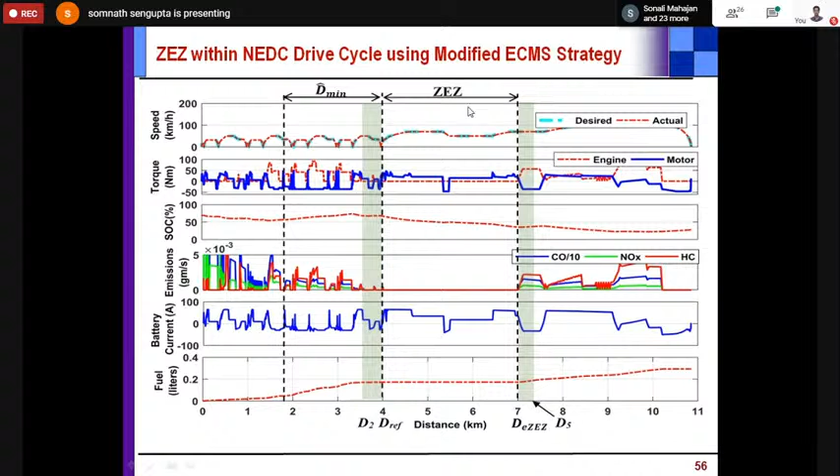And you can see the emissions also, right? Around the emissions also quite low, right? Around the vicinity it has started increasing, but these are the buffer zones, so it's okay, right? So but here the emissions were completely zero, and it could afford to do that. So that was the beauty of our technique.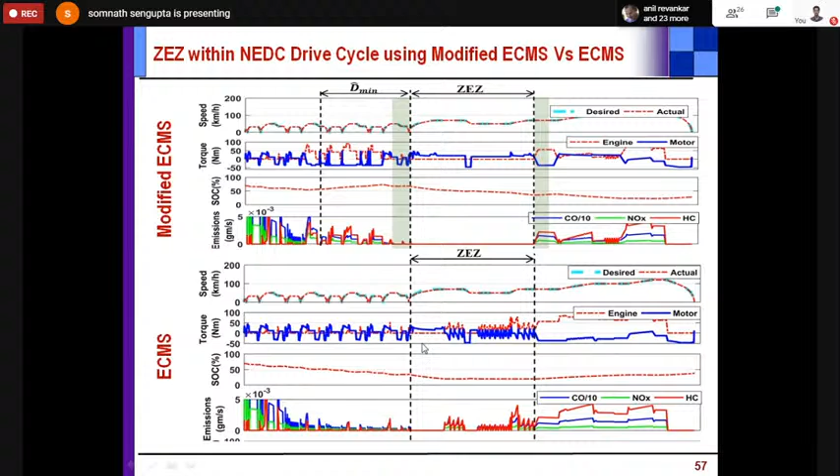Okay, so then this is the comparison between ECMS and both of them together, modified ECMS and normal ECMS. So one was a zero emission zone. This is the ECMS, you can see that SOC has dropped down. It could not save for a rainy day, but here the SOC was sufficient. So this is just together, just celebrating the success, nothing else.

And then this is using a different drive cycle. Okay, so there's a different drive cycle using ECMS strategy. Again, you can see that here you have still some fuel consumption. It was somehow in this drive cycle able to manage to some part, and then it was not sufficient. You can see this is the desired speed, right? So it could not deliver sufficient torque to overcome and track this speed, right?

And because of which the vehicle HEV ran out of the battery, and it had to use the engine. So that's why you can see that the engine was used, right? The SOC became very low, below it became equal to the minimum possible. 20% is the minimum we have taken, and then after that it gave torque. It was forced to deliver the torque in order to satisfy the speed.

Similarly, the battery also, obviously the current, we were not using the battery because there was hardly any charge left, but we used the battery only for regeneration to absorb more charge. And you can see the fuel went up, so which was undesirable. So till here it could manage, but after that it could not do it because this is a normal ECMS, it did not predict in advance.

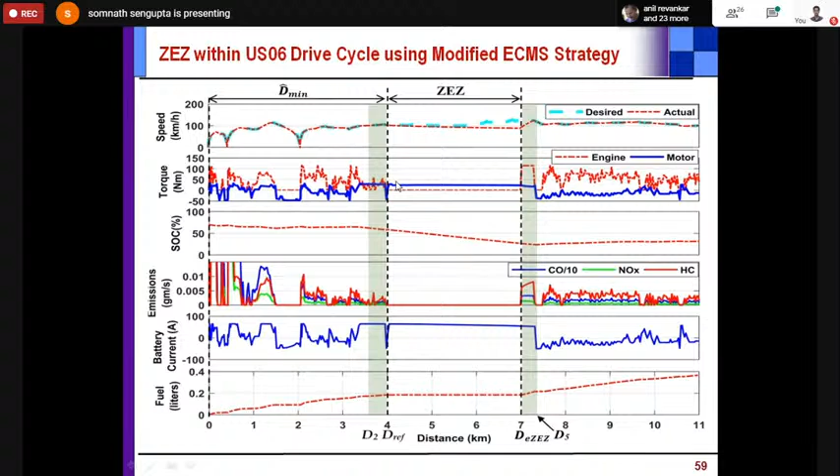And the battery, obviously the battery current also was quite high, but thanks to the fact that it was delivering sufficient amount of torque, right? So you can see the engine torque is zero, but the motor torque is quite high, around 25 Newton meter or something. So it was sufficient to do that.

But then you can see that here it is compromising on the speed, right? It is saying that okay, at least even if I'm not able to satisfy my speed, but at least I'm not using fuel consumption, right? I'm not using any fuel, right? I'm not, there are no emissions. So that is also a compromise, right? So I'm saying that I'm not producing sufficient torque.

So why could it not produce sufficient torque? Because my SOC was low, because I had to save for a rainy day. I knew that in order to go there I'll be consuming this much SOC. So that's why I gave less torque, so that it was able to deliver just enough speed, right? You can see the speed, it is just giving some minimum sufficient speed, so basically it was going at lower speed than the desired, but it did not emit any emissions, right?

So the fuel also consumed was very low during this region. Later on it again picked up, it was consuming fuel later, and it was zero emissions, right? So that's perfectly fine.

Okay, so again, using these are the comparison between those things, and these are the numerical results that we got, right? The fuel consumptions under different drive cycles.

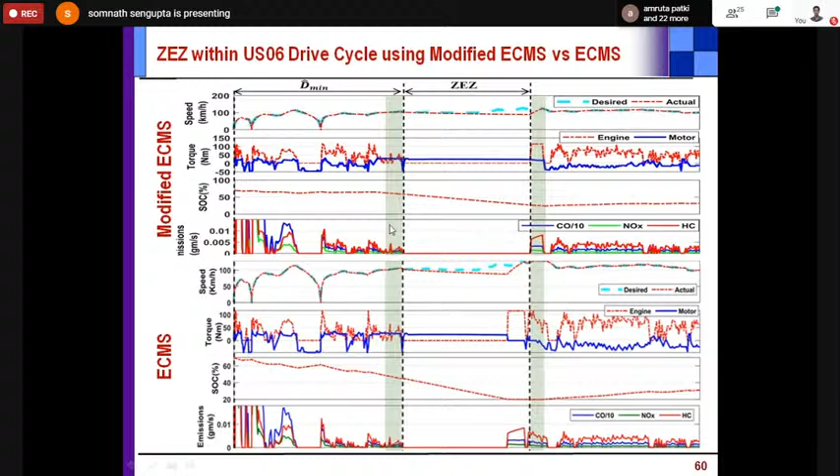This is quite substantial, and for the US06 also it was quite less. For different drive cycles we could reduce the fuel consumption, and at the same time we could also allow the vehicle to move in pure EV mode even in the zero emission zone, right?

As I said, we cannot achieve both things. Let us look at the emissions part now.

Yeah, you can see the energy consumption was more, but the emission part was here. So this is quite troublesome, right?

The overall emissions was here, 2.5706, but here, oh sorry, so here it was a little bit higher for the MECMS NEDC, but for the same NEDC in normal equivalent consumption minimization, it was lesser.

So why did that happen? Because you can see that most of the emissions, because of these things, we rapidly used it in the non-zero emission zones.

We aggressively use the engine so that we can save the electric energy, and then we kind of wrap up.

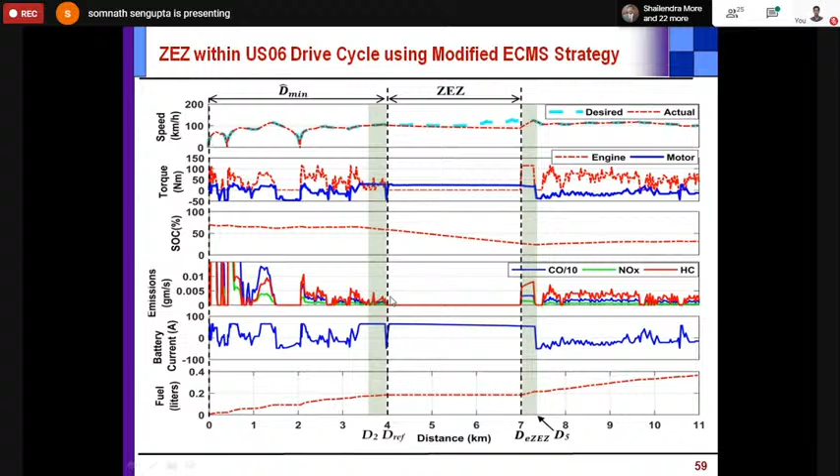And so because of that, the emission actually got pushed to the non-emission zones, but we could ensure that, sorry, we push to the non-zero emission zones, but you can see that in the zero emission zones we could maintain zero emissions.

So that was the thing, but it got spread into some other places. That was the compromise which we had to make.

But then it was just a little bit different, just 0.01 gram difference for that entire drive cycle. Similarly this was 2.566, but here the modified emissions - this is how I'm talking about the entire drive cycle.

Okay, but here this is the unburnt hydrocarbon. But you can see the carbon monoxide - the carbon monoxide here was more in the ECMS, but here it was less.

So because they go to different operating points, it's very difficult to say, because it might so happen that the hydrocarbon emission for some operating point is more, but for the same operating point the carbon monoxide may be less. So that is the reason why we got this kind of results.

But then yes, we could have emissions - obviously there were substantial emissions outside the region, but not inside the region. So that was what was important here.

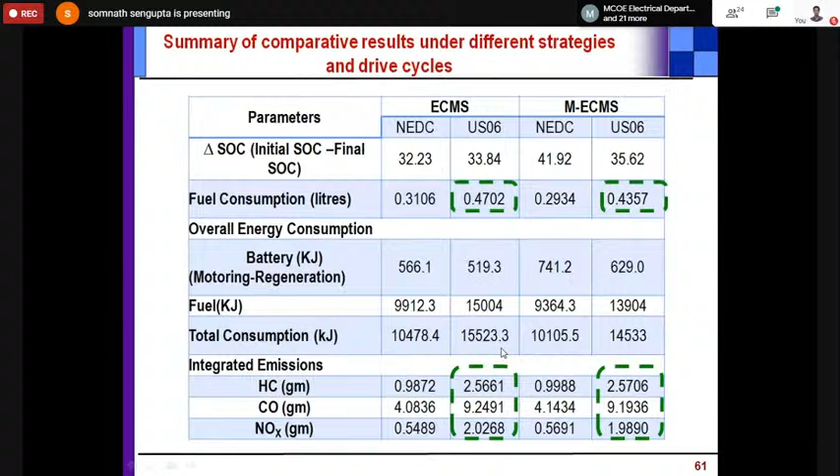Okay, so similarly, this is about the delta SOC, the change in SOC for modified ECMS, right? You can see the change in SOC. So there was the difference in the fuel consumption.

So what was the different fuel consumption? All these results are also presented. Yeah, so all these plenty of analysis were done - energy consumption, integrated emissions, total integrated throughout the drive cycle, how much the emissions were given.